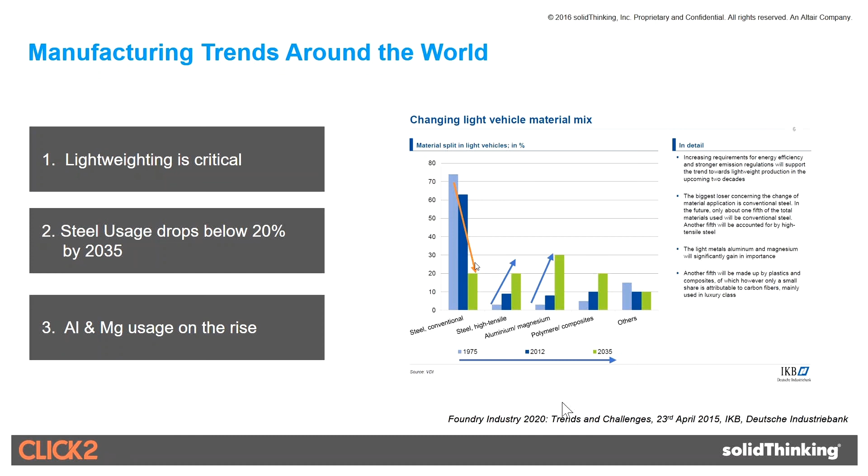The number one thing they said in manufacturing around the world was that lightweighting is the number one topic of contention among all manufacturers today, for obvious reasons like energy conservation, environmental pollution, and other considerations, as well as general efficiencies of structures. Having established that, the interesting fact this report mentioned was from 1975 to 2035. If you look at the trends of utilization of different types of material, they predict that conventional steel, which was in use 70% of the time in manufacturing in the 70s, and this is conventional steel, less than 25 KSI.

They predict by 2035 that's going to reduce to less than 20%. They say high strength steel and alternative materials are going to increase in utilization and climb up. Aluminum and magnesium already you see in some newer vehicles like the F-150, with large utilization of aluminum and also magnesium right now in the Chrysler Pacifica and in the tailgate, which is completely casted. It's pretty compelling for those of us in manufacturing, the innovative ideas coming in.

So having said that, to summarize the three points: lightweighting is absolutely becoming critical, as the report claims looking at all the manufacturing issues around the world. Steel usage is going to drop below 20%, and aluminum, magnesium, and other alternative materials are rising. What that means is that we have to innovate.

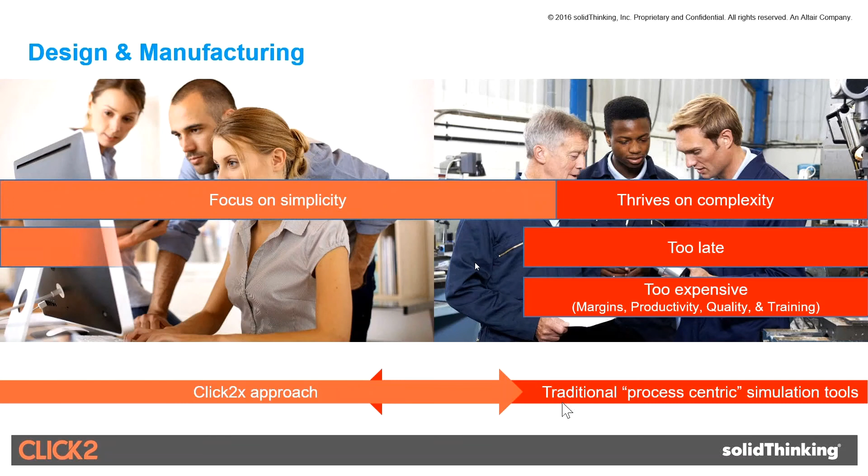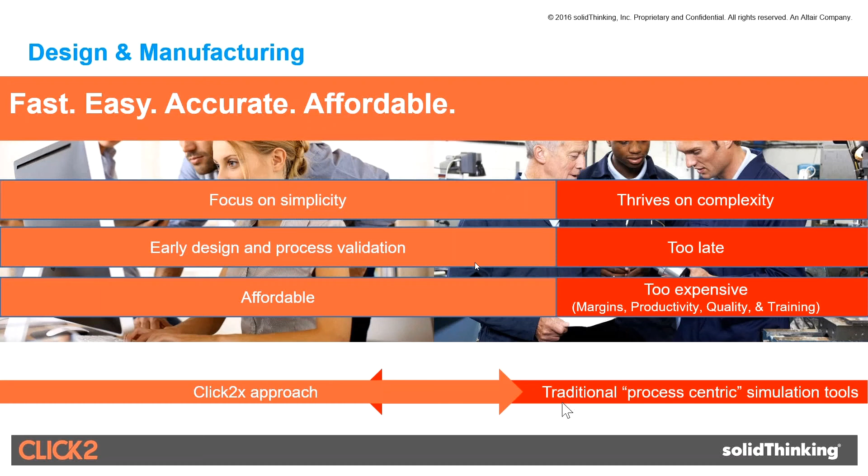Over the years, the design community and the manufacturing community have pretty much drifted apart, where the design community throws something to the supply chain and says, go figure it out and make this. As a result, the complexity in manufacturing processes has gone through the roof, because product design and manufacturing communities have worked in their own individual silos. There's a great need for higher levels of early collaboration with common tools across these silos.

And that's what we are trying to address, bringing them together. If you look at manufacturing simulation software in the past, it has thrived typically on the complexity that arose because of these two different silos. Often they're too late to make any changes in product design, and also too expensive, both to learn because of process complexity, and to modify designs at that later stage.

So as a result, under this new paradigm of lightweighting and new materials coming in, we feel you have to start manufacturing feasibility right from the design stage. That's the approach we're taking with a whole slew of products, focusing on simplicity, coming in from the left, right from the product design side with early design and process validation, and offering tools that are affordable and don't bankrupt companies trying to use them.

At the same time, we want the solutions to be fast, absolutely easy to use so it's part of the workflow, and also accurate—we don't want to compromise on any physics involved. This is the kind of framework we're building for accelerated lightweighting, and we've done that very successfully with a product called Inspire, which was basically targeted towards all the designers.

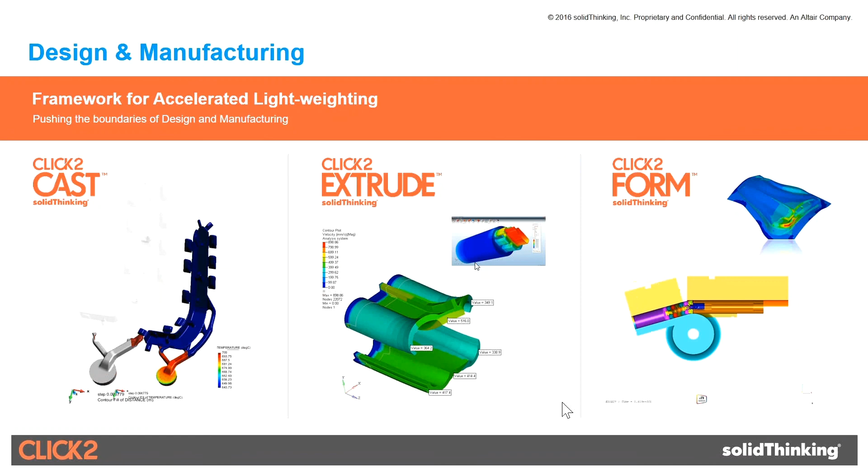We also have standalone products to address the casting market and casting components, and also for metal and polymer extrusion. We also have solutions for sheet metal forming with Click2Form. These products are called Click2Cast, Click2Extrude, and Click2Form. All these products, in conjunction with Inspire which generates the shapes, is what we call the framework for accelerated lightweighting.

Where we're pushing the boundaries of design and manufacturing, specifically simulation-driven design and manufacturing. We'll look a little deeper at casting, because it's easier to understand and one of the oldest ways to manufacture things. We'll concentrate on those two areas today, and also talk about bionic structures.

So before we get into what Inspire is and what topology optimization is, I want to mention what bionic structures are. In the 19th century, orthopedic surgeon Dr. Julius Wolff said: as a consequence of primary shape variations and continuous loading, or even due to loading alone, bone structure changes its inner architecture according to mathematical rules, and as a secondary effect, governed by the same mathematical rules, also changes its shape.

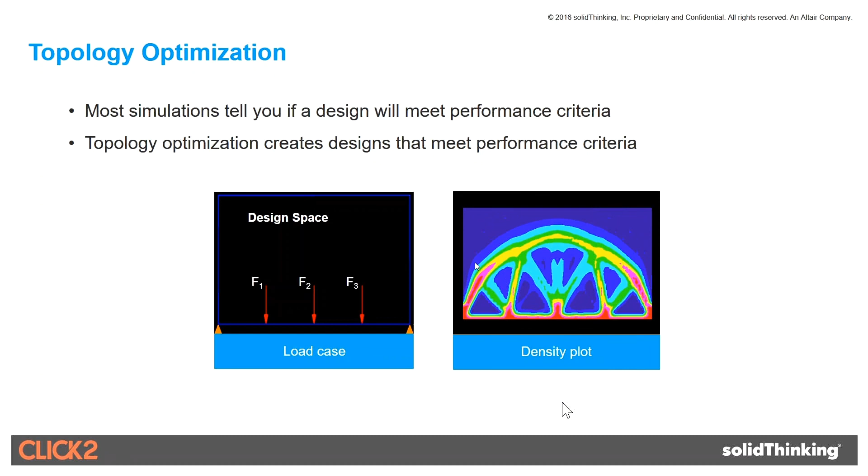So what he basically said was that bone structure internally grows based on the loading conditions. Not only internally, but also externally, the shape changes based on the loading conditions. This was basically the inspiration behind topology optimization that we introduced about 20 years ago.

Surprisingly, the biggest interest came from the aerospace folks, who were the first adopters of this. Let me establish what this is.

For those of you who are engineers, I presume most of you are on this call, how does this work? In most simulations, you basically take a component, apply loads and boundary conditions, and determine whether it meets the required loading conditions, whether it meets the requirements.

But in topology optimization, you do just the reverse: you define a design space, apply the loading conditions, apply the boundary conditions where you're holding the component, and so on. Once you apply it, it automatically generates the shape that meets the purpose. So you're coming backwards, applying the loads and boundary conditions.

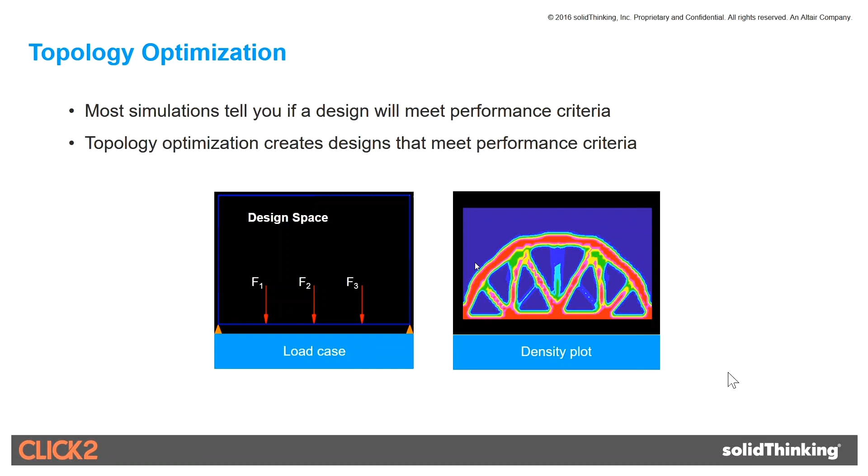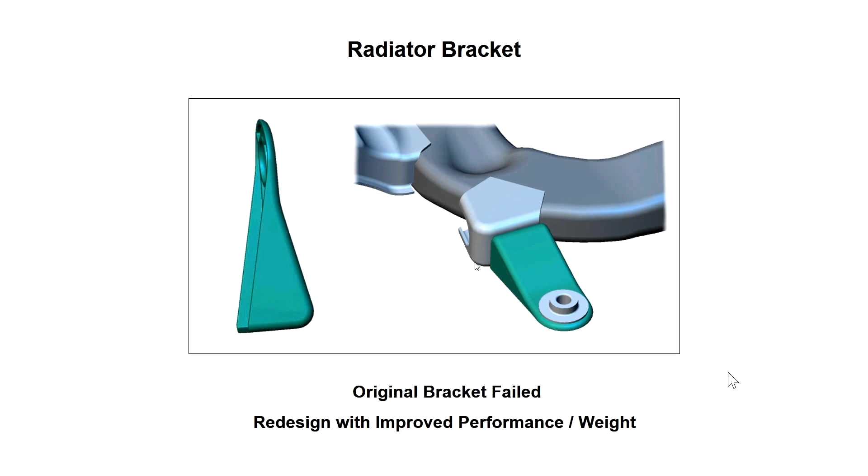For example, here you have a square space, and you apply uniform loading conditions, holding it at two ends. On the right-hand side, it automatically comes up with a shape that looks like a bridge structure. For those who recognize this, it's one of the older structures - one of the first bridges in the world, designed by the Romans, who figured out this shape. But now, with mathematical computation tools available, you can generate this, and we'll see a lot more examples.

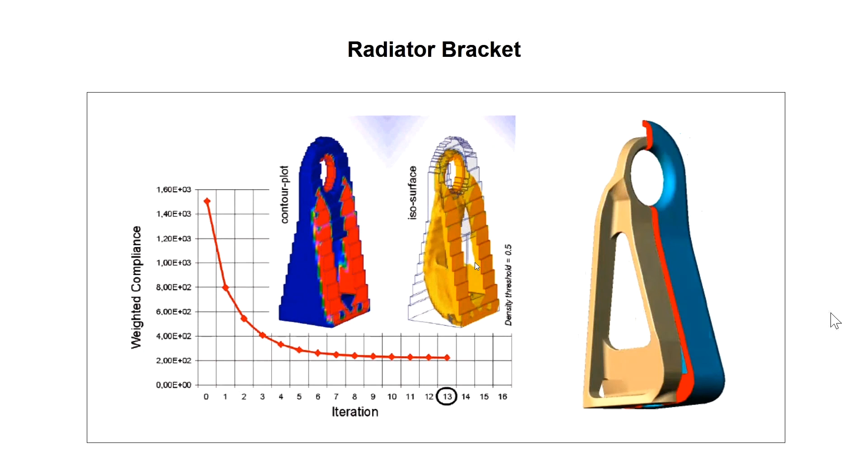The red areas you see on the right-hand side - what Inspire or OptiStruct is doing in the background is automatically giving you the optimal load path. The red areas tell you where you need to put mass. The other areas, you can just take off - there's no necessity for mass there. That's what we call a density plot, and it becomes a driver - it gives a template for how your design should look.

Let's take another example - a Volkswagen bracket we did many years ago, a good example to show you. We took the loads and boundary conditions on this bracket. We make a complete design space, then start iterating, removing material where it's not necessary. By the end of about 13 iterations, it comes up with a complete structure that meets the requirements - the loads and boundary conditions.

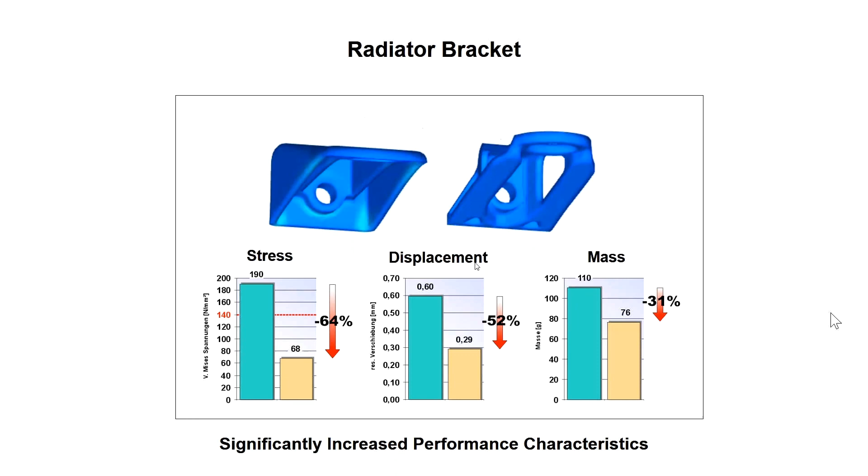So how does this look? On the left-hand side is the original design under the same loading conditions. You can see the red areas showing the high stress areas, plotted to the same scale.

On the right-hand side is the optimized, topology-optimized bionic structure that has a 64% reduction in stress under the same loading conditions. The total displacement is 52% less. And guess what? It's 31% lighter.

So this is an amazing principle of topology optimization, where you are creating designs that meet the purpose and at the same time reducing the weight. So it's completely optimal from that perspective.

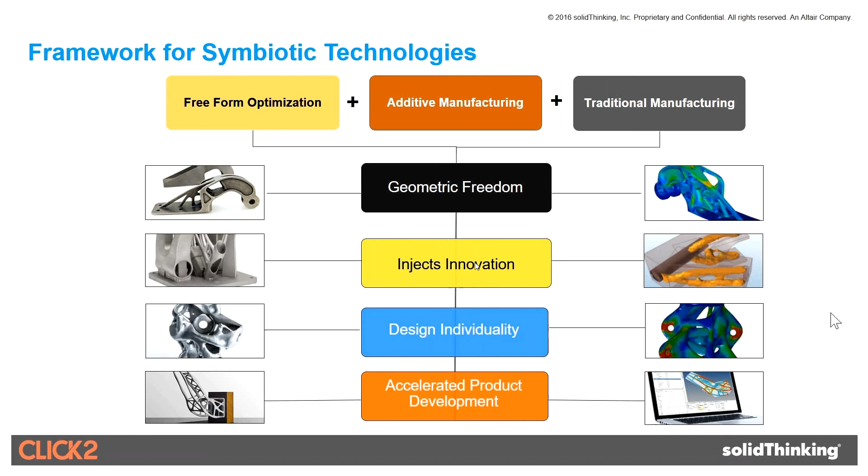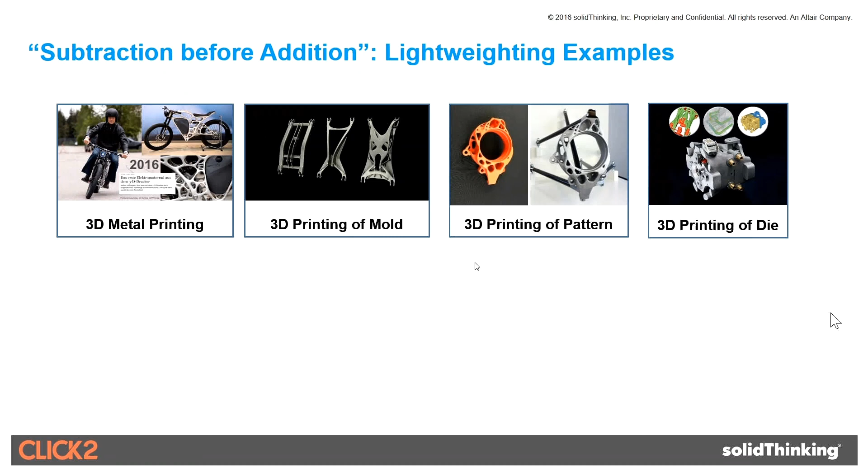One of the important things about topology optimization is if you combine free-form optimization with newer technologies like additive manufacturing and traditional manufacturing, you get a tremendous amount of geometric freedom. It injects a tremendous amount of innovation and gives design individuality, meaning you're not creating the same component you created 10 years back, but a component that meets the purpose very well.

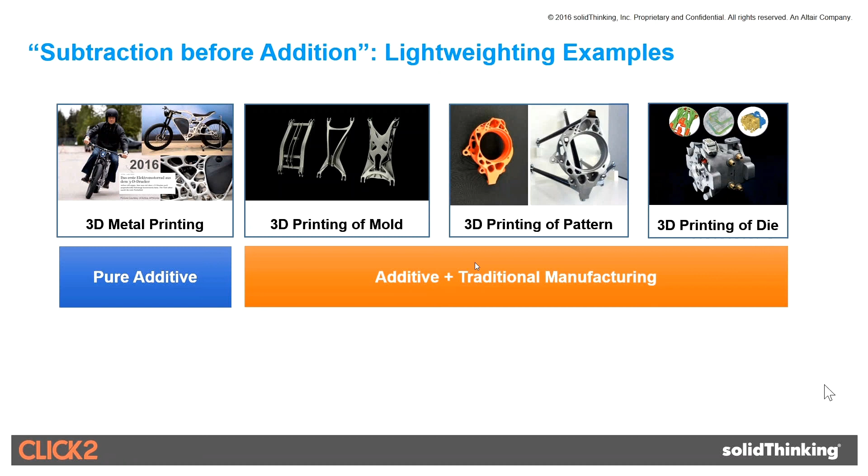It's individualized to that particular form. The form perfectly fits the requirements. It also helps accelerate product development because very quickly you're able to generate these shapes instead of trying many experiments. Based on the loading conditions, you're generating a shape that meets the purpose much more quickly than ever before. Having said that, I always talk about subtraction before addition.

So I'm going to give you a tremendous amount of examples as food for thought, lightweighting examples, where we've looked at 3D printing itself, metal printing, as an enabler, and also how some of these new technologies can combine with traditional manufacturing to create tremendous amounts of opportunities and accelerated lightweighting products. So let's jump into that.

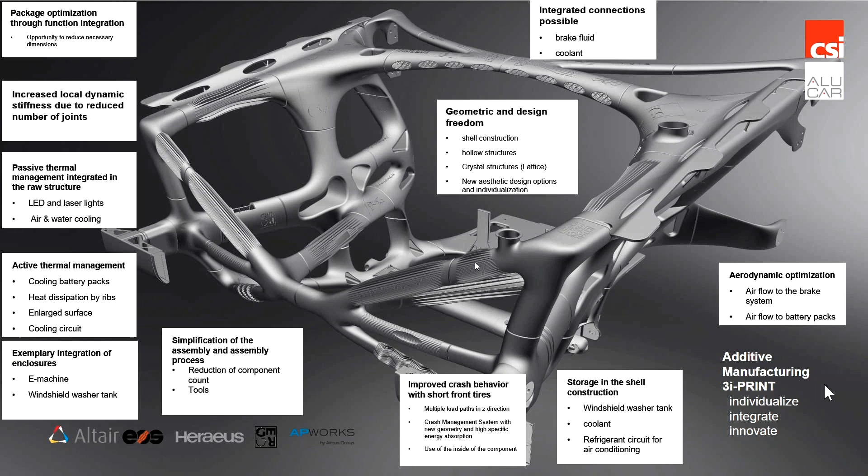Let me give you the first example here. This is something we just released last month, hot off the press. This is a complete front-end structure redesigned for the Opel GT. Exploiting the entire geometric and design freedom, it's a shell construction, completely hollow, and a combination of hollow and lattice structures. It's a completely new aesthetic design.

There's a lot of firsts in that: package optimization, the package is completely optimized, and the function and integration of multiple components into one assembly. So instead of having hundreds of parts, you have a lot fewer parts by beautifully integrating all the requirements. It also has passive and active thermal management, as well as the enclosure. The hollow structure also acts as a reservoir for the windshield washer tank.

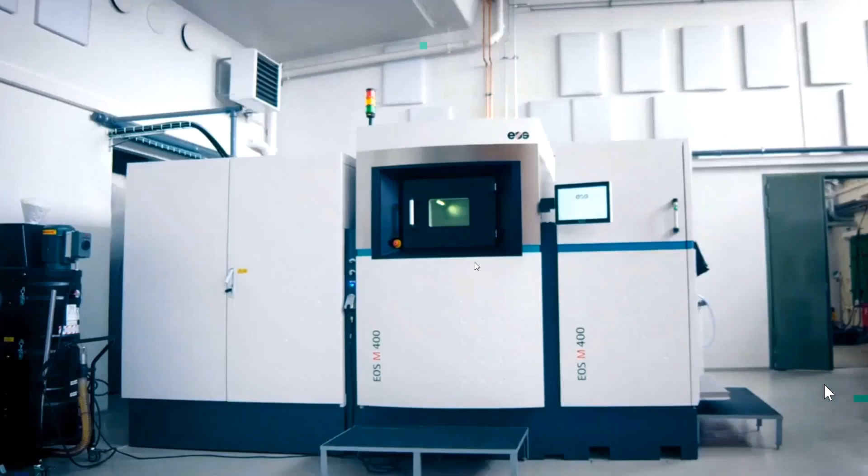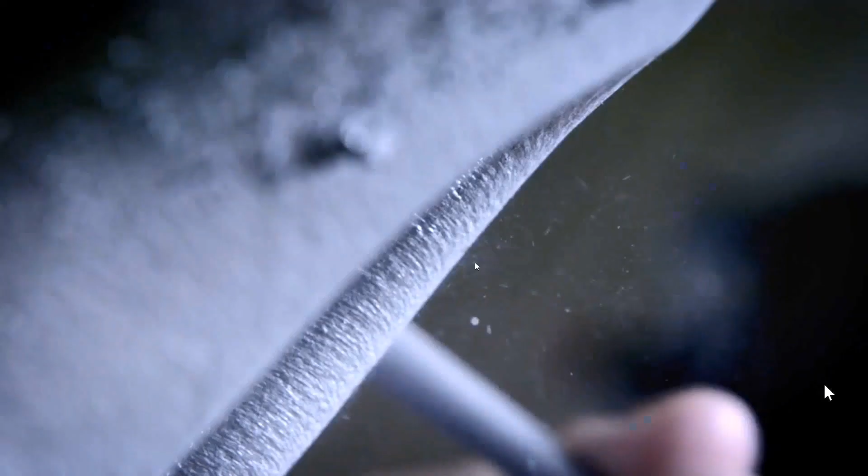As well as any of the fluids required for coolant and so on and so forth. So multiple purpose. I want to show a quick video of this as well, the making of this, where this was completely 3D printed to create this front structure. So indulge with me here. There's video in this, there's music in it—I've muted the music.

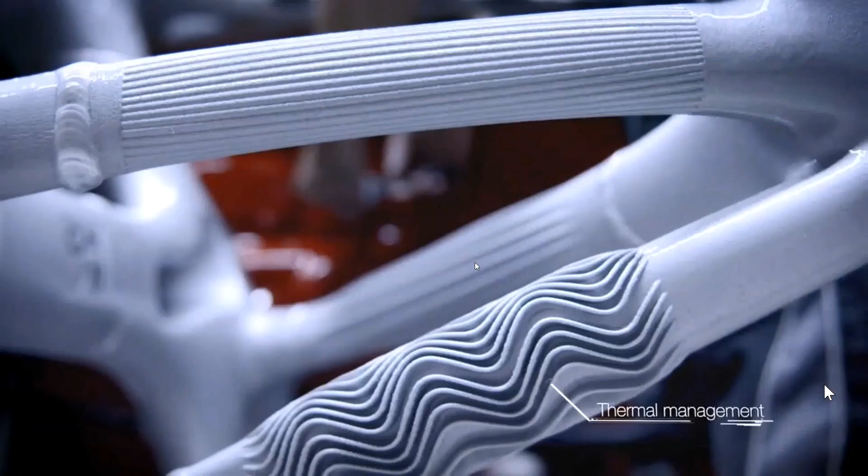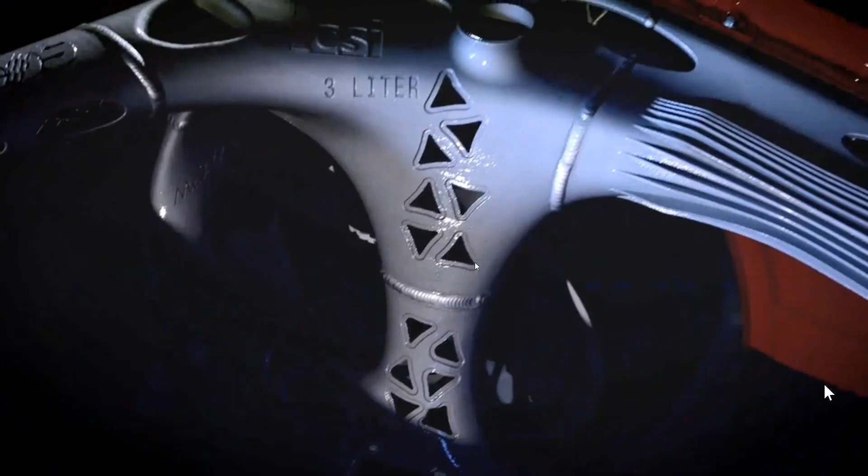But basically the whole idea was to start the entire design from scratch. It was individualized, completely integrating multiple components. So lightweighting is not only about generating a lightweight structure, but it also gives you the opportunity to combine multiple components into one single component. In this case, it was also optimized for front-end crash, in addition to having the shape optimized for aerodynamics, and also passive and active thermal management as well.

This was 3D printed with our partners EOS and CSI, and we basically created this very compelling piece. For those of you who will be at the Formnext show in Germany next month, you'll have the opportunity to see this firsthand. The whole vehicle will be there with the front-end structure.

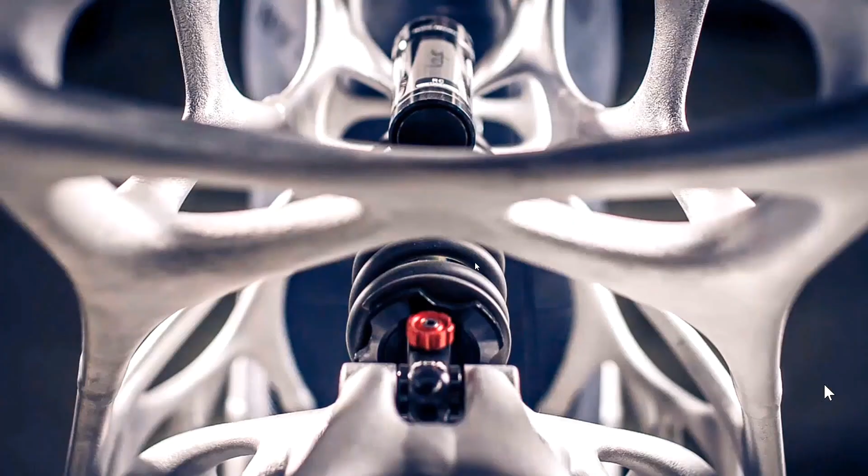And you can see that the components were 3D printed as individual pieces and then welded together. You can see the brake cooling there, and you can see Altair's name in there as the driver for the design concept here.

You can also see a combination of lattice structure as well as traditional structure, and that is the front end of the Volkswagen. EOS, Heraeus, AP Works, and CSI were the partners in this particular case. If you want more information, you can get that from there.

This is one example, a compelling example, to show you what is possible with bionic structures. I also want to show you another quick concept here: the complete frame, where you define the design and non-design space, apply the loads and boundary conditions. This is a motorcycle frame that we worked on.

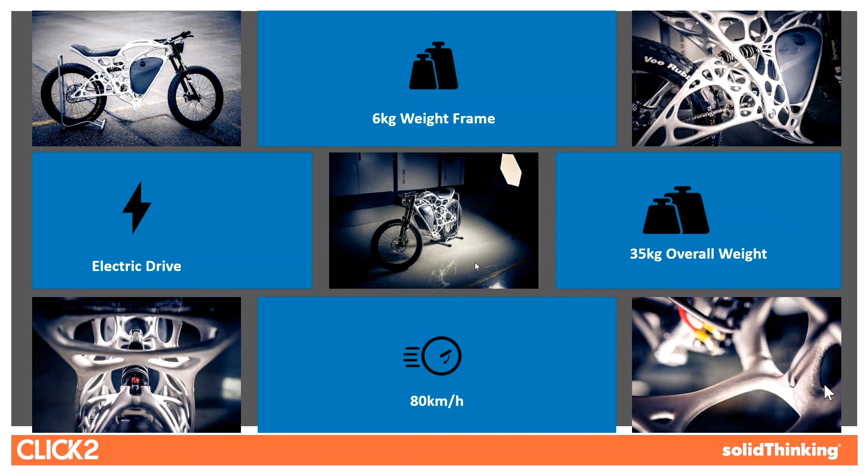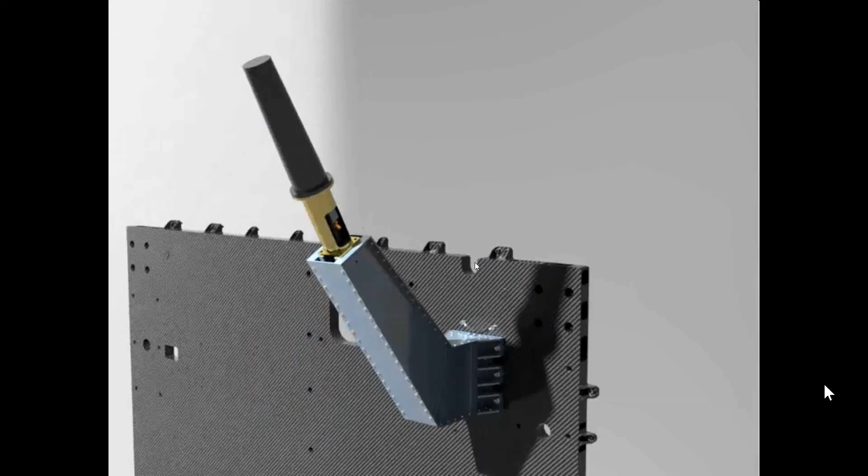You define the optimization parameters, and then you come up with a bionic structure that you see on the screen. Then you basically reanalyze it, asking, does the bionic structure that's coming out still meet the requirements? So you do a re-engineering, reanalysis of that, and look at it. This is the final product that you see.

To summarize, the entire vehicle is only 35 kilograms in weight. This is an electric motorcycle. The entire vehicle itself is 35 kilograms. The lightweight frame is 6 kilograms in weight. And also bear in mind that a special metal alloy was created for printing this particular thing in partnership with EOS and AP Works. Very compelling story of what is possible with these bionic structures.

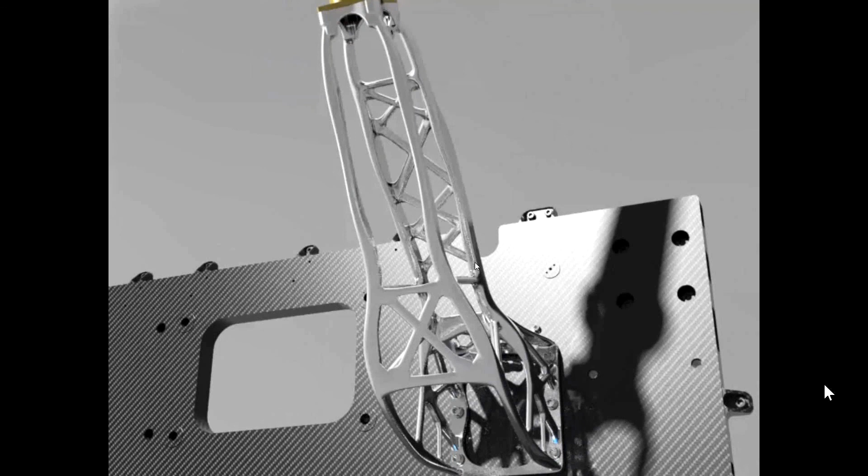I want to give you another example, similar example. This went from the road - we're moving from cars to motorcycles, now into space. This was a bracket for a telescope, one of the probes that went out into space.

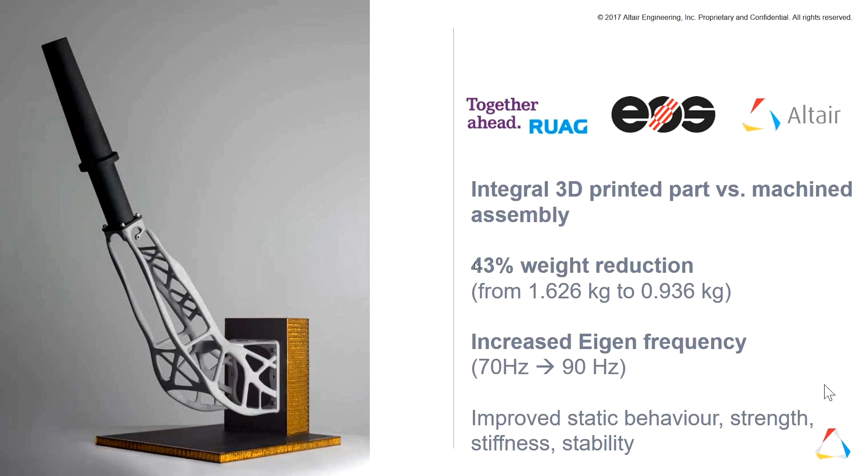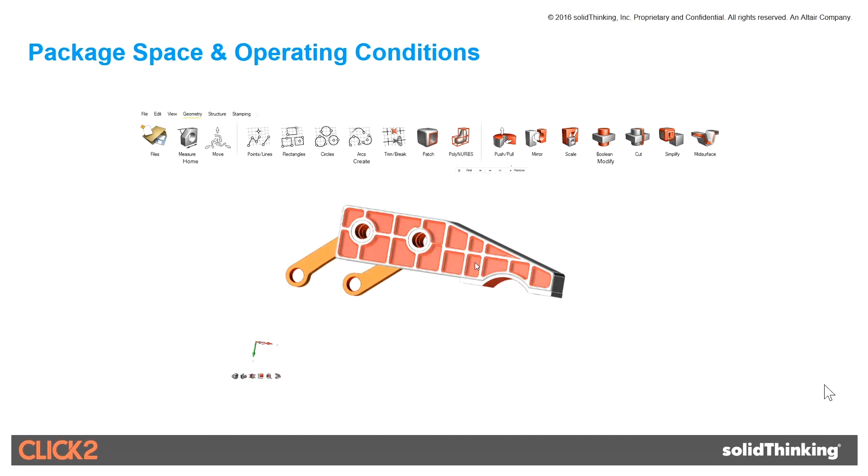The original design obviously was taken out, and the loads and boundary conditions were applied to this. Once the design was swapped, the design space was set - this is the design space we're going to work on. Both the stiffness was increased, and at the same time the mass was decreased to come up with this bionic shape that you see, super stiff and at the same time super light. You can see how the shape actually grew.

And if we swap in, this is the final part that was actually printed and sent over to space. Again, this was in partnership with EOS.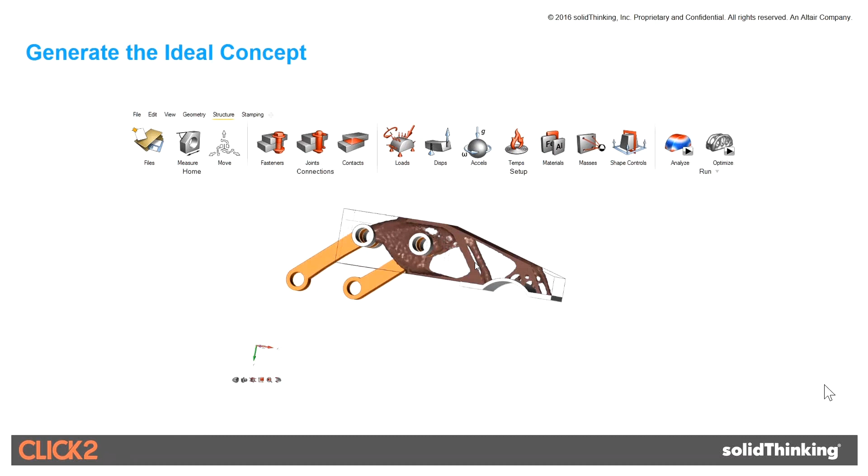To summarize this, there's a 43% weight reduction, and the eigenfrequency, which measures the stiffness, went from 70 hertz to 90 hertz, with improved static behavior, strength, and stiffness. So in addition to being light, it's also phenomenally engineered for the purpose.

There are a lot of other examples you can see as well that we have done across the board. But I do want to zero in on a few other things. Let's look at this from a manufacturing perspective. Let's say, for example, I have a robotic gripper here for a robotic arm.

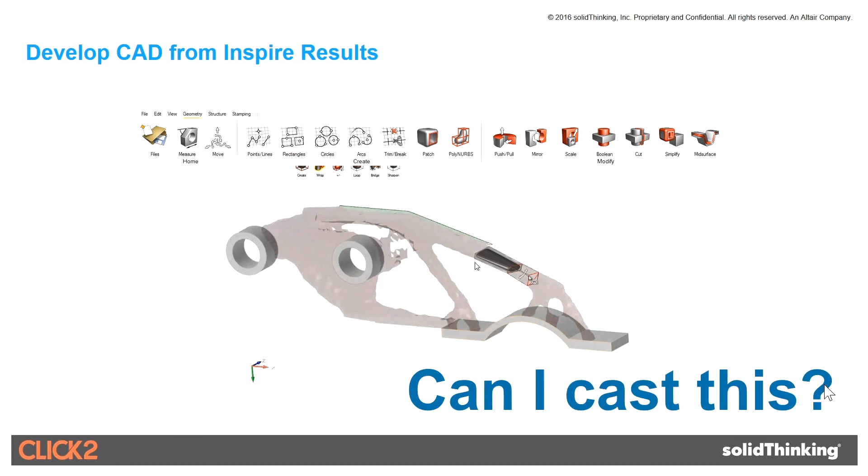And this is what you're seeing in the background, Inspire. The way I'm trying to help you understand the process - you're applying the loads and boundary conditions with a very simple set of menus that you see on the top.

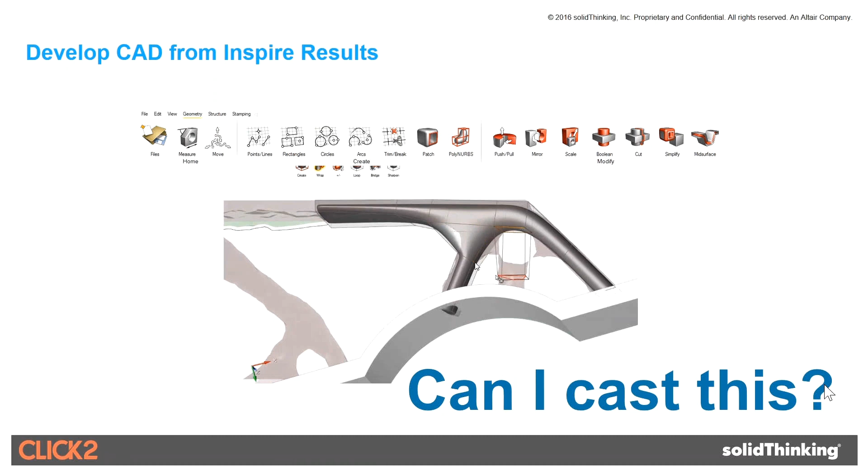So you took the original design, created a whole rectangular kind of space around it that envelopes the whole area, and said, remove the old design. I'm going to work with this space, apply the loads and boundary conditions, and Inspire automatically generates the shape that meets the requirements and tells you what the shape should look like. Based on that, you say, okay, this is what I'm going to make.

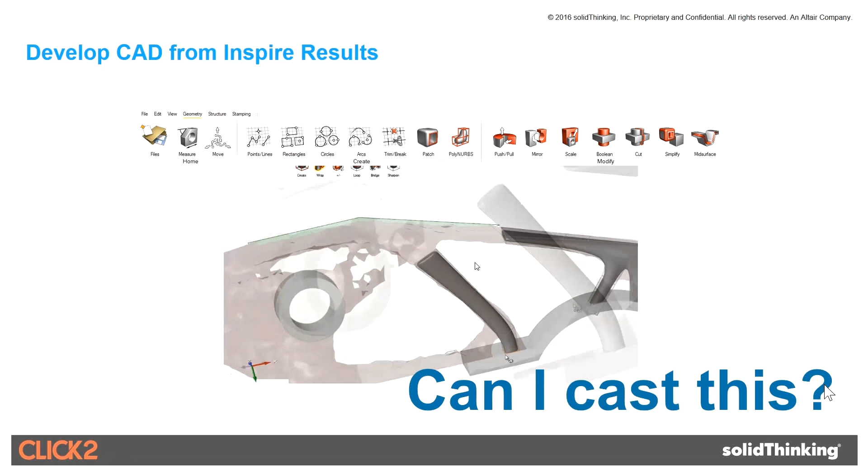Now the question is, how are you going to actually make this? In this particular case, we said, let's not 3D print this part - let's see if we can cast this component. And obviously, we have tools to take the geometry that comes out of Inspire and clean it up.

We create some really nice, smooth surfaces using a function called PolyNURBS that we have, which creates solids as you create those surfaces. Inspire basically gives you those surfaces from the topology optimization, and you can just envelope it with a very smooth surface using PolyNURBS to create some really nice geometries.

Now the question is, can we actually cast this? So what we did was take the original design and run a quick casting analysis using Click2Cast. On the left-hand side is the original design; on the right-hand side, we're pouring the casting in there and trying to see what the likely issues are in this case.

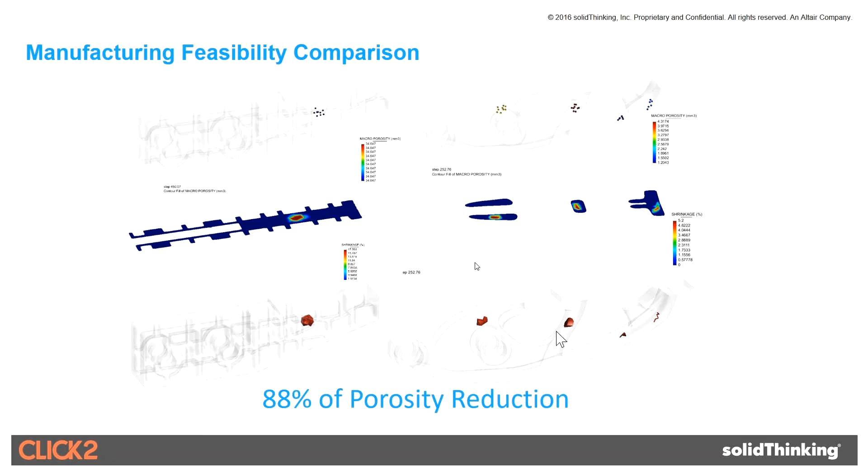It's drawn to a different scale, but I'm showing you the porosity, which is a measure of when materials shrink. In casting, one of the biggest things the casting guys will always talk about is porosity - when material changes from a liquid to a solid phase, there is a shrinkage in volume, and usually that shrinkage accumulates in the areas which are the last to solidify.

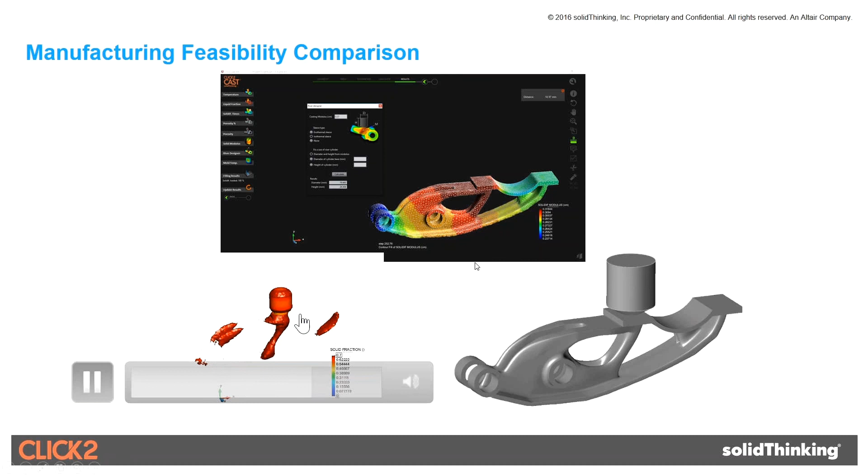If you look at this particular case, it's showing you a big blob of porosity right in the center where the junction is. Whereas on the right-hand side, if I measure the area of porosity, there's an 88% reduction, went from 34 millimeter cube to 4.3 millimeter cube in one location. So what it's trying to tell you is that not only have you lightweighted the structure, but interestingly, it also becomes easier to cast because the porosity is 88% less.

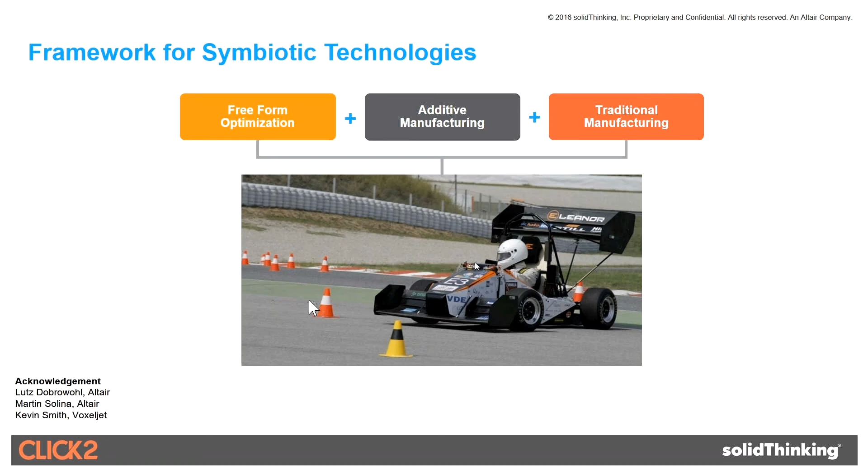So we saw where the actual big porosity was likely to be, and then we put a riser in there and evaluated whether this riser could feed the porosity. We did a quick analysis to show you the contour you're seeing there is the last areas to solidify. The red area is the last area to solidify. So you can see that basically the riser is the last area to solidify, telling you that it has fed the porosity in that region.

So this is, again, a 30% reduction in weight on this robotic gripper.

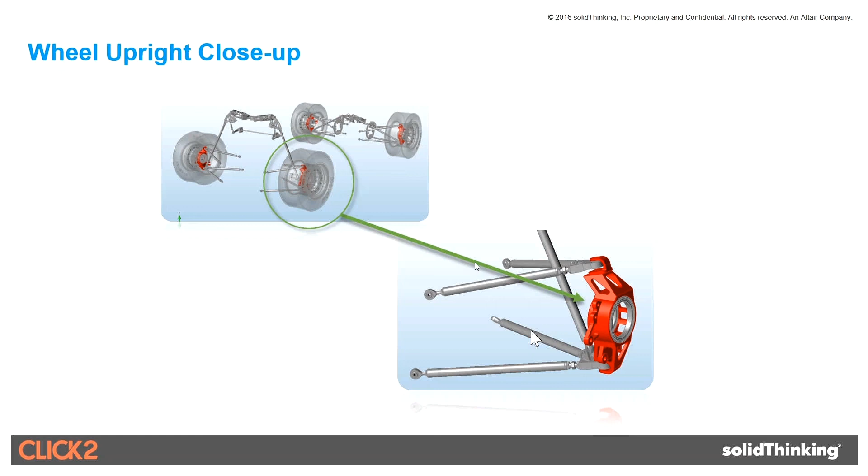Let's look at some more examples to give you the whole idea of what freeform optimization in combination with additive can do. This was a student racing car that we worked on, an electric racing car with a European team. We were designing the wheel upright, shown in red color on the right-hand side. It's a very critical component in racing because that's the main component that takes the loads - the driving loads, braking loads, the cornering loads. This is the main component that transfers the load from the tires over to the suspension.

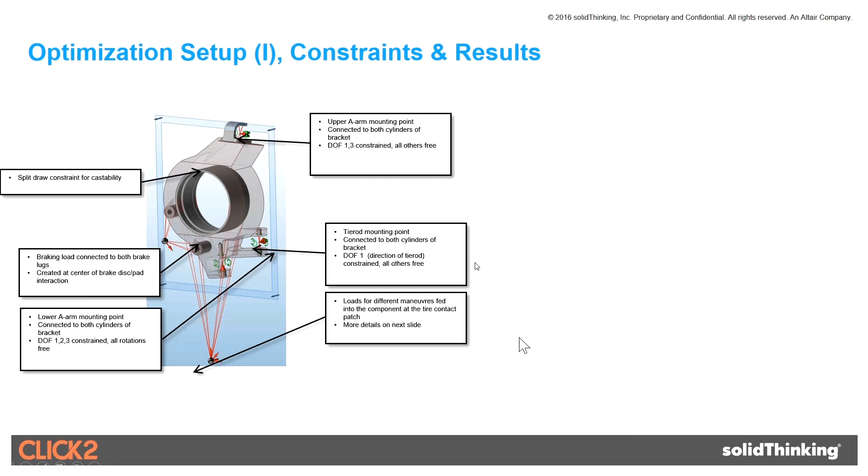So a lot of complex loading going on there, and we wanted to look at what we can actually do to reduce the weight and improve the performance.

So in this case, that's the original design that you see. The original design was machined to look like that, with a lot of different boundary conditions. I don't want to get into details, but we looked at the loads for different maneuvers - loads for braking, for cornering, and so on and so forth.

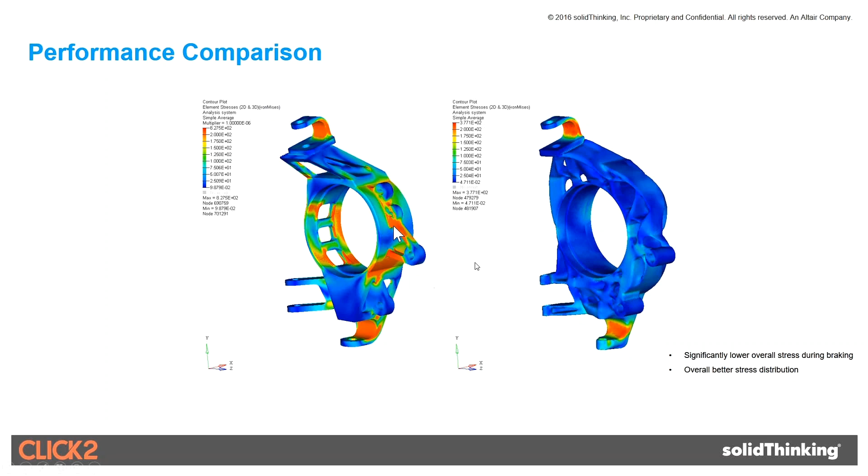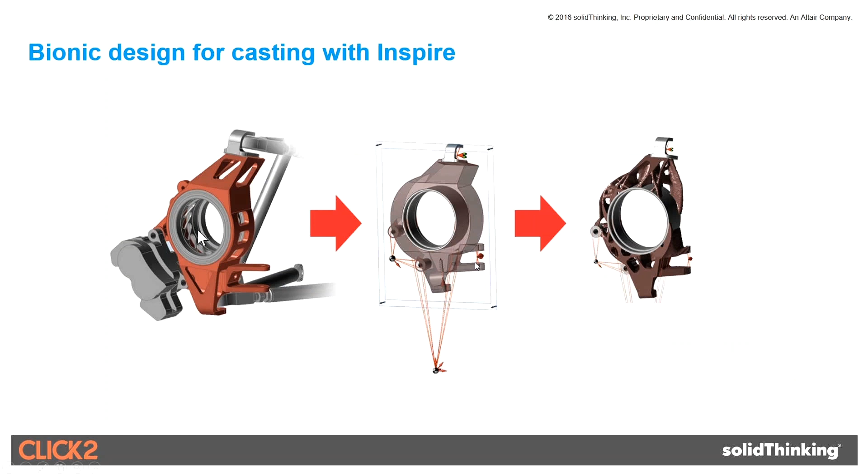And we put all those loads in, and at the end, you get this bionic topology optimized structure that you see on the right-hand side. We also compared the bionic with the original design, drawn to the same contour levels, and you can see that the stress in the component is much lesser than the original design.

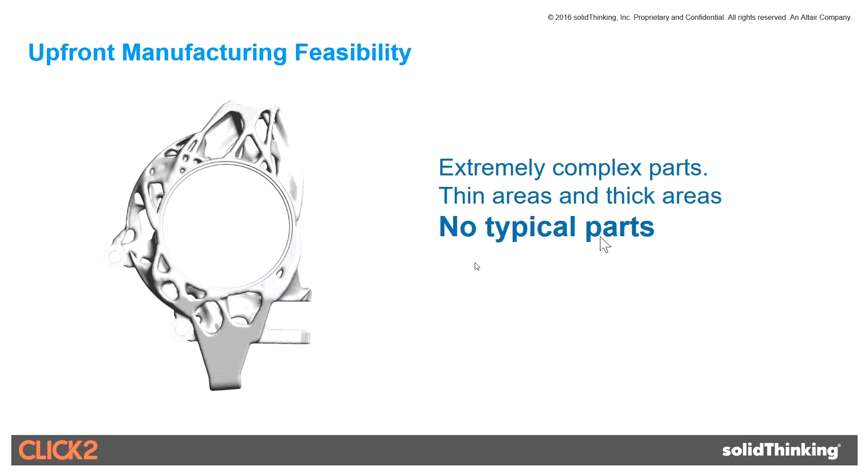We also ran a fatigue analysis on this as well, I'm not showing that here, but we did that. And in addition, we also looked at the casting, which I'll come to in a second.

So basically, this is the original design, and this is the bionic structure. And this is not a typical component at all. If you look at it, this is not a design that anybody in casting would have traditionally seen, because it has a lot of undercuts, and at the same time, it's impossible to cast with traditional methods.

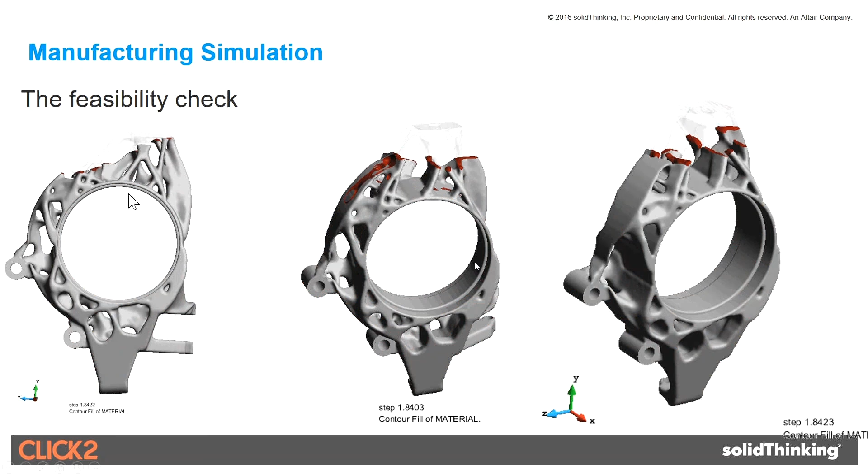So how did we do this? Can we even cast this? We asked this question, and the first thing we wanted to explore is how can we very quickly identify the areas where you want to start pouring the material. We use something called an investment casting process, and I'll come to that in a second. But what is the area from where you want to pour the material for casting?

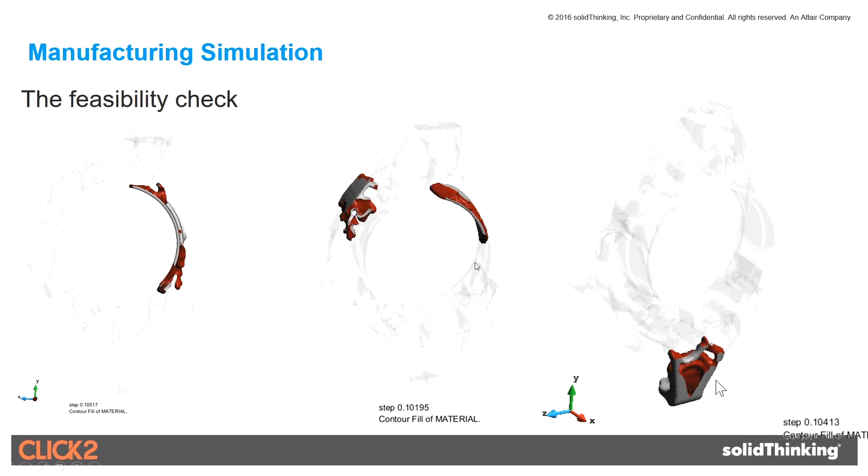So we studied the gate influence. We did the gate influence study over 40 different combinations, but I'm showing you only 3 different cases here. On the first, you have a gate on the left-hand side on the top, and then 2 gates - the second one and the third one, a gate at the bottom.

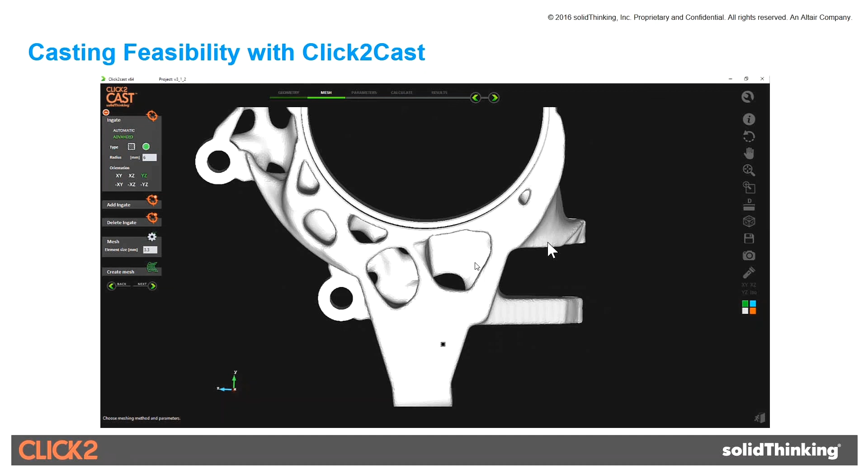So we very quickly analyzed these 3 shapes, and you can see that if you look at the left-hand side, we deemed this was not the best because there's a lot of turbulence and a lot of different fronts coming and meeting at different times with different temperatures, introducing a lot of other issues that could happen in the casting. Here as well, it was the same thing.

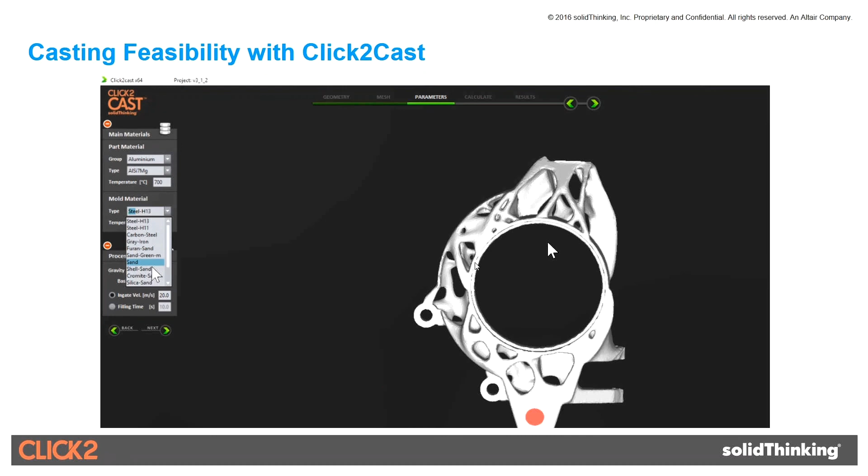You had a lot of turbulence when you had two gates. So finally, we went ahead and had a single gate at the bottom to feed this casting, which was much less turbulence. And we also evaluated this using Click2Cast.

We took the shape in. It's a very easy to use environment. You just bring it in, and you can do detailed analysis here, but we're showing you a quick assessment of identifying where to put the gate location. Within 5 steps, you can define what kind of material it is, what kind of mold it is, and do the entire casting simulation on your desktop or laptop.

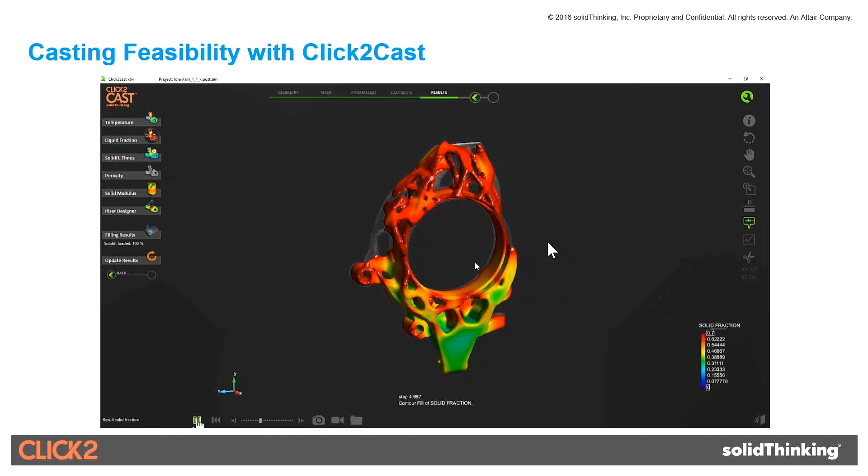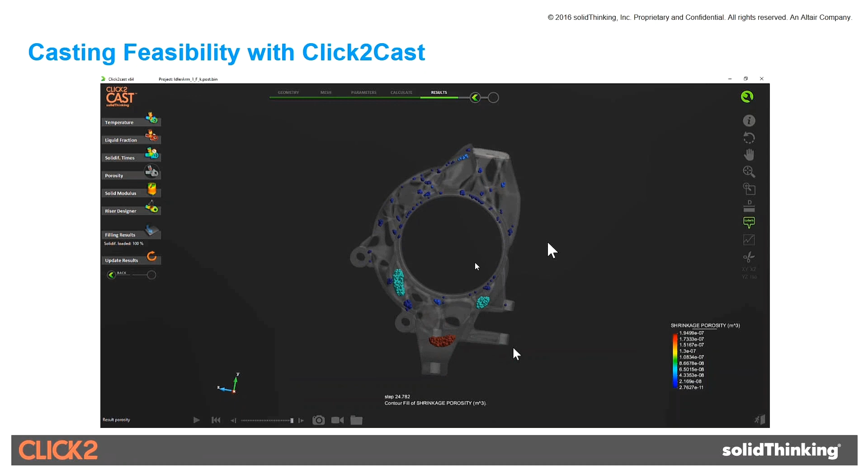Here you've defined the gates, you're defining the process parameters, doing the filling and the solidification. It's an investment casting process, which I'll show you in the next screen. Then you evaluate how the flow is. You do both flow and solidification analysis, see the last areas to solidify, how the vectors behave during flow, and look at the solid fraction, which shows the last areas to solidify. We identified a couple of areas where there could have been porosity, but it's very, very small.

So to summarize, we took the original design, and what we did was we 3D printed the pattern. And the investment casting process—if you do not understand the process, I'll take a second to explain that.

It's one of the oldest casting processes, where in the old days they used to carve wax, and the wax was put into a slurry of sand. The sand sticks to the wax, and they take the whole thing into an oven. When they put it in the oven, the wax melts off, leaving the sand cavity, and then they would pour the material into it.

And that's exactly what we did here. We 3D printed it using a Voxeljet printer, in PMMA material—basically a wax-like compound which melts. You put it in the oven, and then pour the cast. On the right-hand side is the final casting that you see.

Comparatively, in this case, the weight reduction was almost the same, but the performance was way, way, way better. So that's another way of looking at what we were able to achieve in this particular case. Let's give you another example.

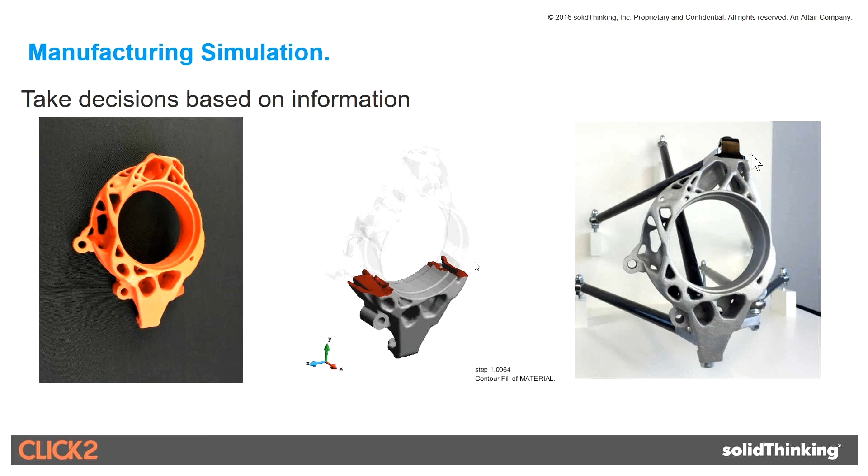So we basically took the same approach, created a bionic shape—by now you know what it is. We also evaluated whether this bionic structure can be cast.

We did multiple analyses on this, looking at the flow, looking at the solidification by putting multiple risers onto the structure, checking whether the risers are feeding into possible areas of porosity. Once we concluded it is possibly castable, we went ahead.

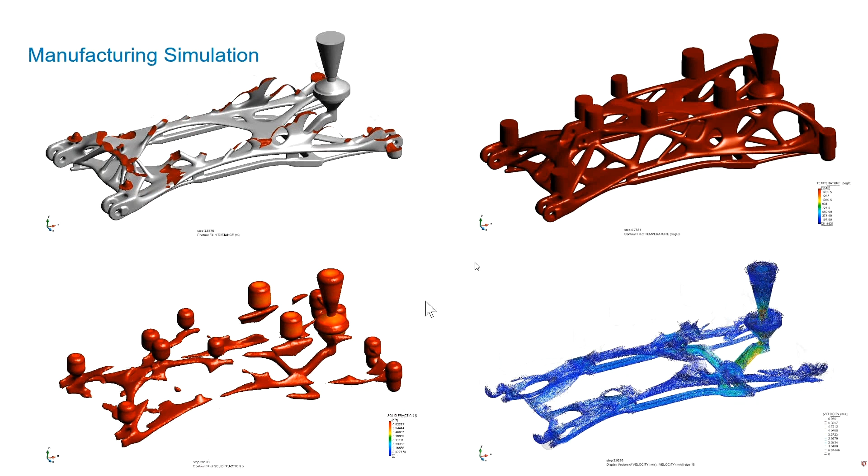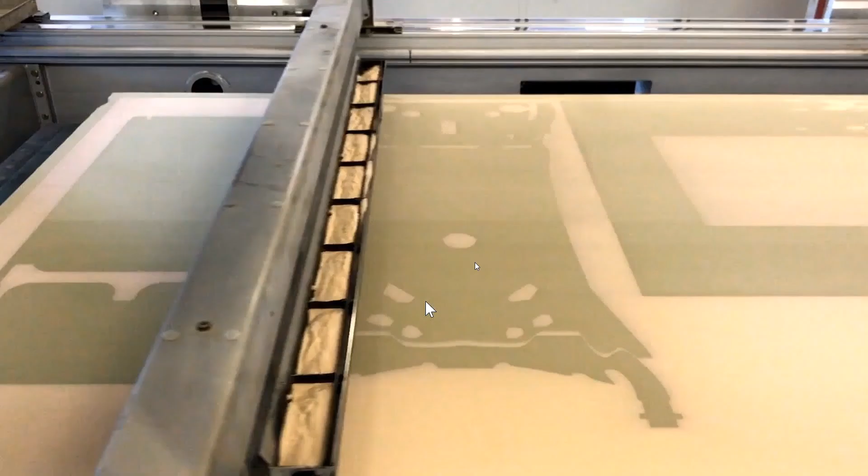And actually the interesting thing was we 3D printed the entire mold, using a Voxeljet printer, which is basically 3D printing the sand. Let me show you the process for those of you who may or may not have seen it. Again, what I'm trying to establish is that we are trying to turn conventional engineering on its head by combining optimization with 3D printing methods and so on.

And here, this was the actual 3D printed mold that was built, and you can see how big this is. It's actually in 3 parts, and I'll show you that in the next slide. And it's printed in sand.

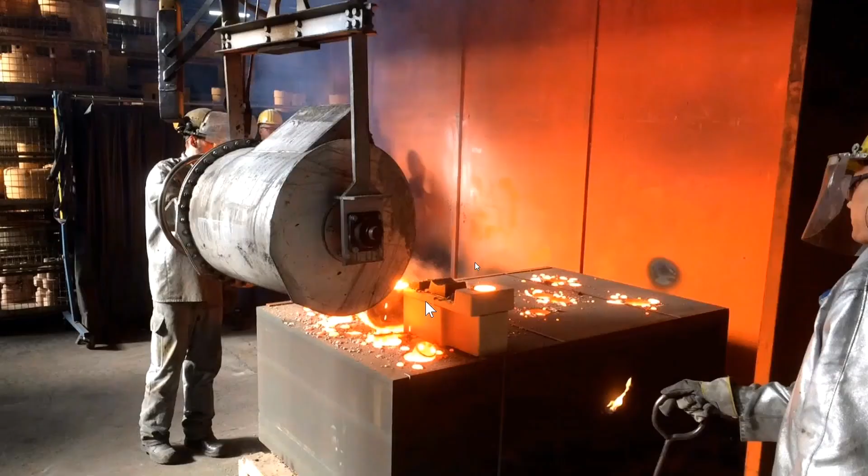And if you look at this here, three of these parts were fused together to create the entire die, and the cast was actually poured.

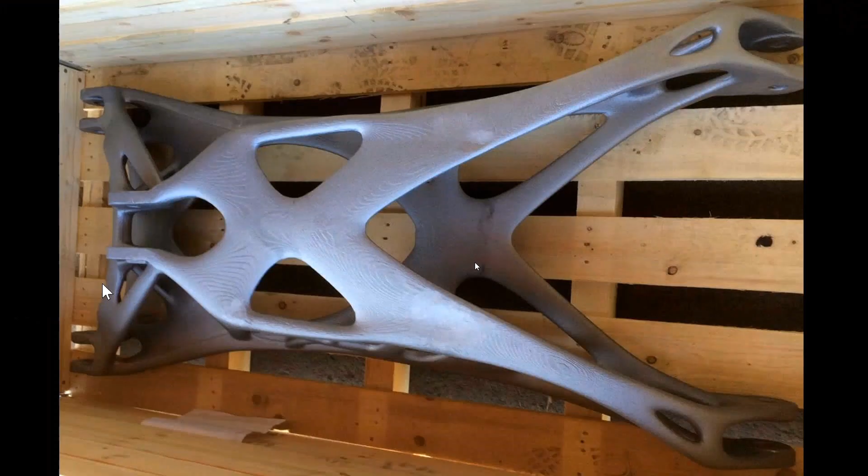So this is a perfect combination of using conventional, traditional manufacturing in conjunction with the new technologies available for 3D printing. This was the final part that was cast, so you could see how bionic the structure is.

We actually did two different combinations of this. One was for traditional casting, taking into account whether you can cast it traditionally. But we went ahead with a more radical shape on the bottom, which combines multiple components into one component, and it's impossible to cast this traditionally.

So we 3D printed it, and the entire optimal casted part was 35% cost reduction. It's an integral part, and if you're looking at integrating components into it, the cost savings are even higher.

For example, the original design had 16 meters of weld, and as soon as you start welding components, you'll also see issues with residual stresses, dimensional accuracy, and assembly issues. But all those things are reduced by having one structure that combines multiple components into one.

In addition, the weight was 11% less, and also 75% lead time reduction, because you're reducing the entire tooling time by printing the entire tooling in one shot. So there's a tremendous amount of savings in this particular approach.

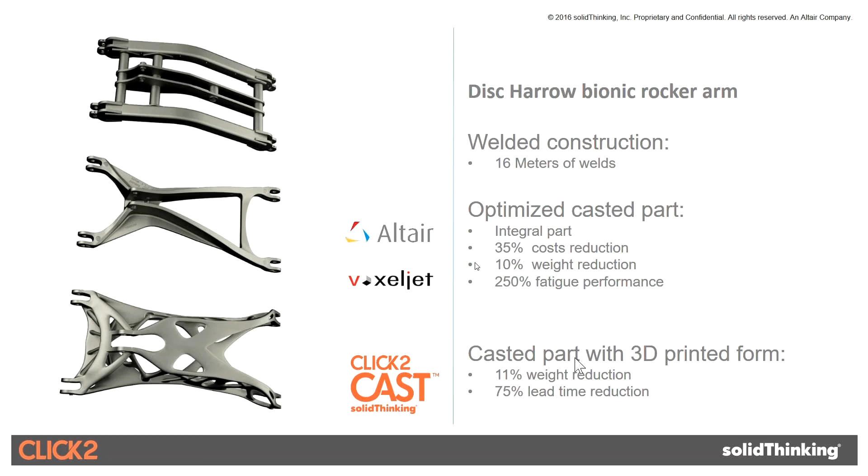I want to take another example, and here I'm moving from a sand printed mold to a 3D printed die for an injection molding die. So in this case, what did we do? It was a very interesting case. We worked with Protek on this in Germany.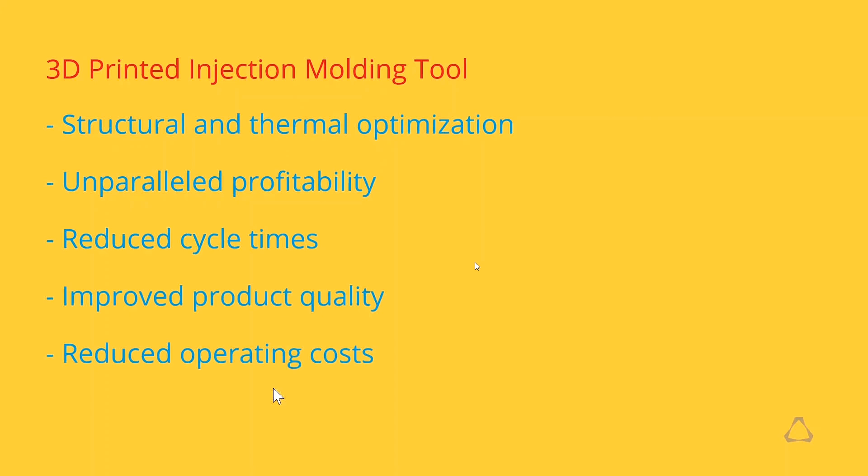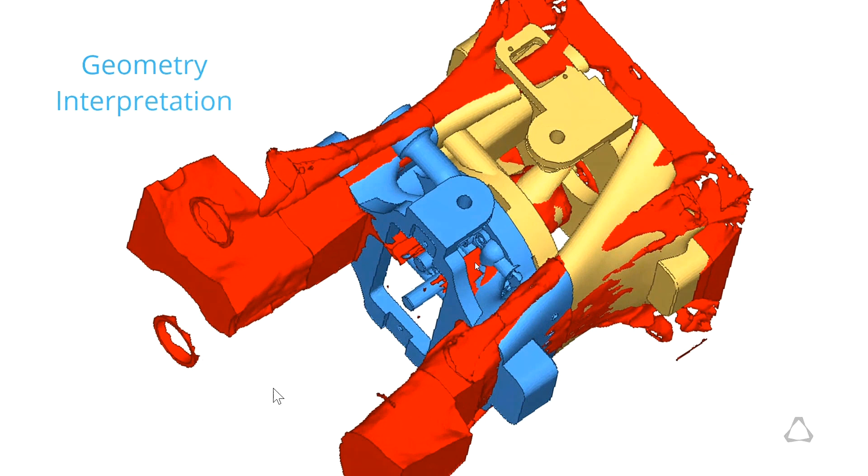In this case, in addition to that, we also looked at the thermal side of it, where we ran AcuSolve, which is the CFD solver within the Altair portfolio, to make sure that the heat dissipation is also extremely efficient. So not only did we optimize it structurally, but we also optimized the heat dissipation, and the whole die in this case was 3D printed.

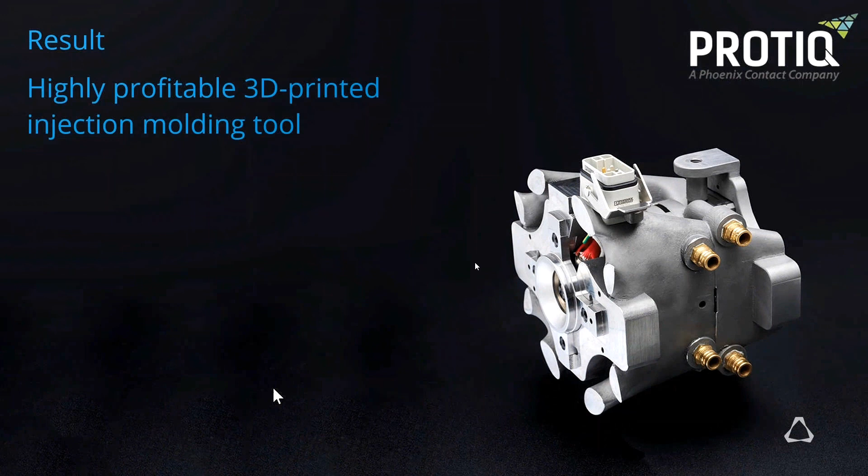So I walked you through multiple examples, and by this time you probably understand the benefits of what topology optimization can do even in traditional manufacturing.

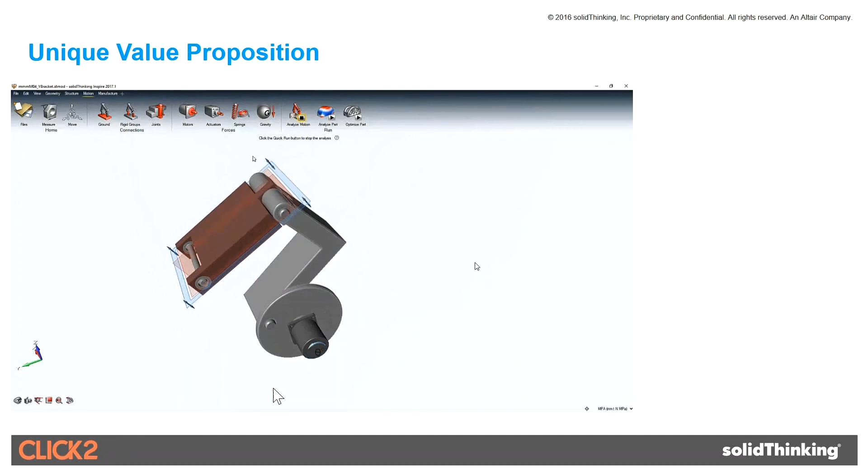So what we are trying to do is build a framework. You're seeing a mechanism here. In this Inspire environment, you're taking a mechanism like this and very quickly optimizing it. You're taking the loads from this mechanism based on how the things are moving, and you're generating this bionic shape.

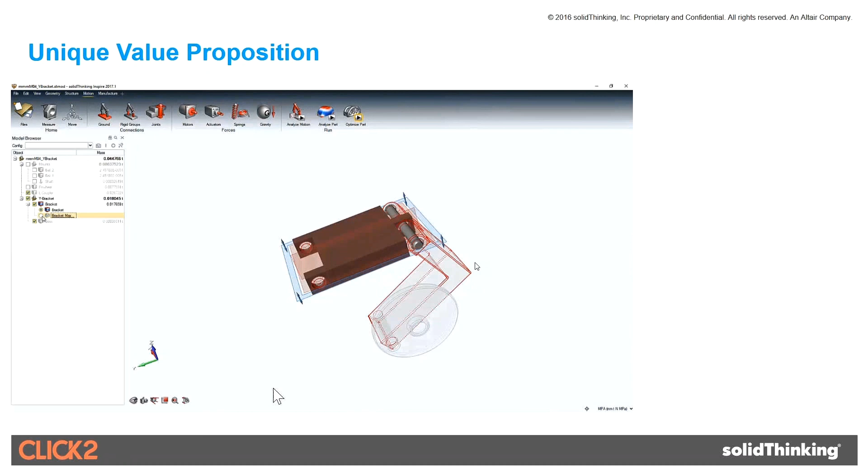In this case, you'll come up with a baseline structure. Once you've come up with this baseline structure, you can go to a quick button. I'm going to pause this for a second. You can click this under manufacture, click this button, and then say, quickly evaluate the casting for me.

And then it'll ask you a couple of questions, and on this bionic structure, you can go ahead and evaluate the casting feasibility within this environment. So right off the bat, as I established earlier, we're giving these tools to the hands of the designers, where as and when they're generating the shapes fit for the purpose, you're also evaluating the manufacturability.

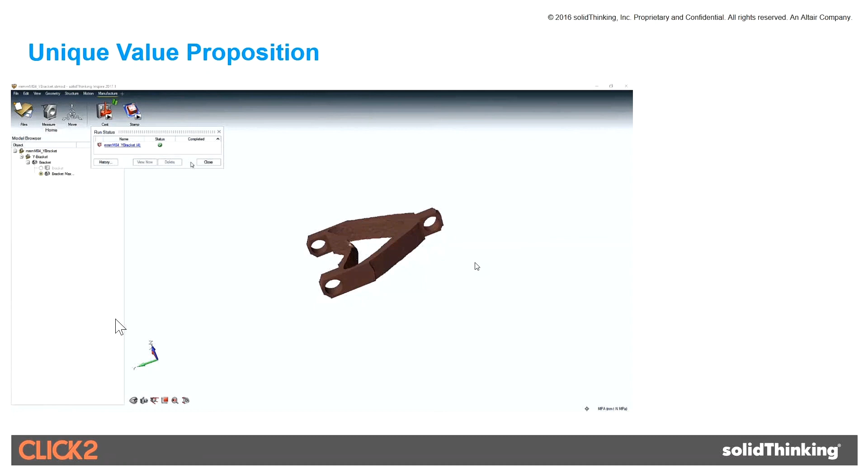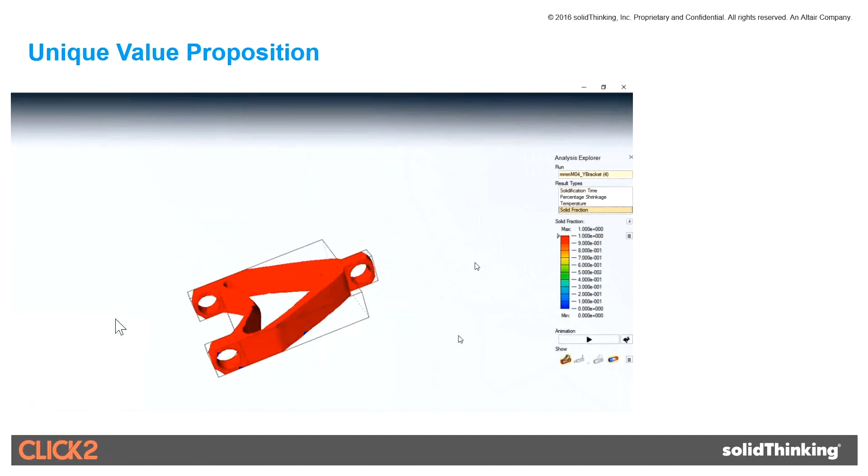Right now, we're seeing the solidification time. The red area is showing you that that's the last area to solidify. I'm also looking at the solid fraction, that is basically where exactly am I likely to see porosity. And I'm cutting the section, and as you move, you can say, hey, those red areas are the areas where I'm likely to get porosity.

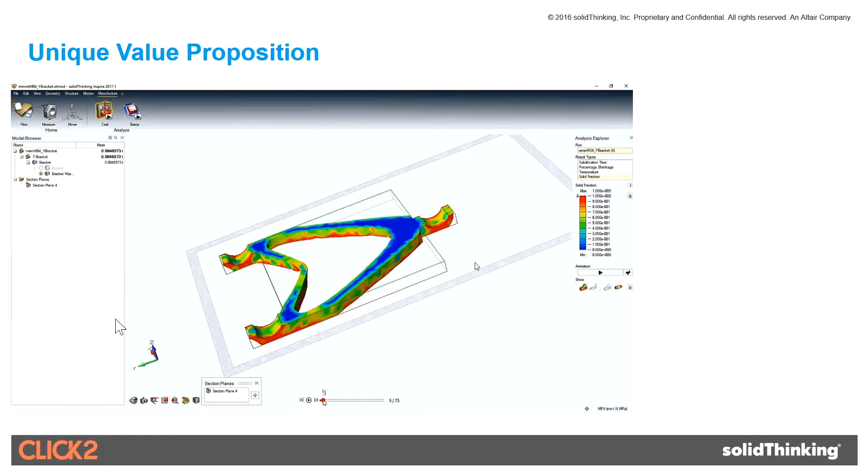So this is something a designer can equip himself with while developing the process, or he can communicate with the manufacturing community saying, hey, this is an optimized shape. I see three zones where I'm likely to get porosity, so please go ahead and do whatever is necessary. Or I can refine this model and put the risers in there, and tell you these are the most optimal risers for you, so you can evaluate very quickly and reduce the entire manufacturing process.

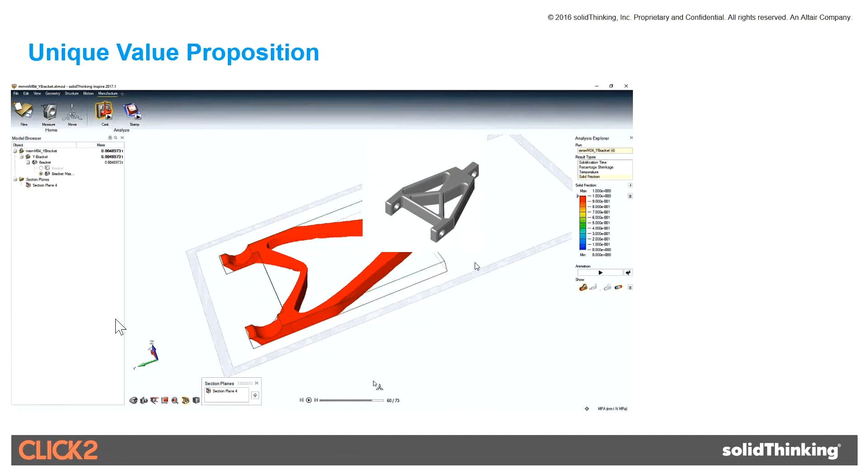So we've gone from defining one mechanism to optimizing the structure and evaluating manufacturing feasibility and giving meaningful information, whether it's a manufacturer doing this or a designer doing the whole thing as a vertically integrated company doing the entire process. You can have one framework to do the entire design as well as manufacturing.

So that in a nutshell is the lightweighting framework for accelerated lightweighting that I just presented. This is a combination of Inspire for topology optimization and our verticals in Click2Cast, Click2Extrude, and Click2Form. Today we saw only the casting components of this, and we'll be happy to present at a later time other technologies as well, including sheet metal forming and metal and polymer extrusion. So with that, I want to conclude a few things.

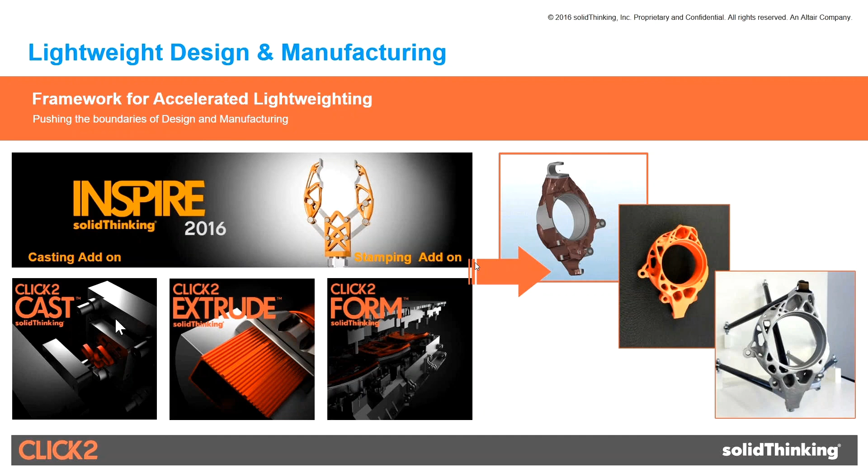Topology optimization has been a driver in design and manufacturing. It's getting more widespread, especially with additive manufacturing initiatives. The right topology optimization tools are extremely effective for lightweighting initiatives, and the bionic designs arising from Inspire topology optimization, in addition to being lightweight, are probably friendlier for manufacturing as well, as we saw in some of the casting examples.

I also want to mention that manufacturing feasibility simulations are extremely cost effective when done in conjunction with product design, not after, meaning you have to start evaluating manufacturing feasibility as part of the product design process. That's what we feel would really help accelerate lightweighting, and give ideas for OEMs and other manufacturers to look at a holistic approach and view the whole design with the eyes of manufacturing. At the same time, take the latest framework to create bionic designs to meet the purpose, and simultaneously evaluate different manufacturing methods to make those radical shapes.

So that's what I had, and I want to hand it over back to Joe.